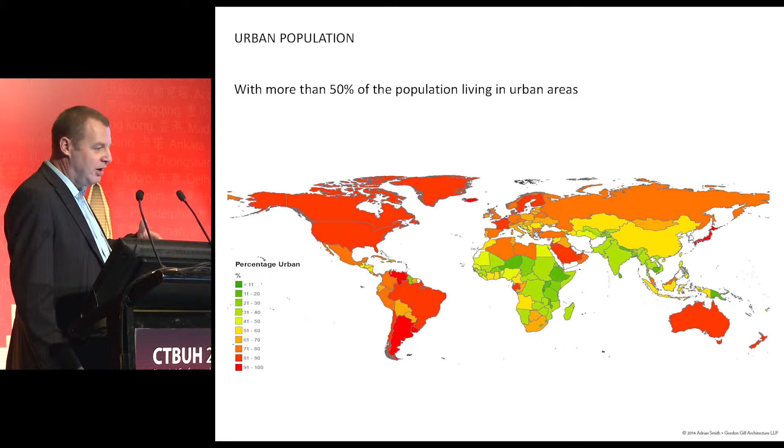But it's not just about the number of people, it's where they are. A couple of years ago they announced that for the first time in history, more than 50% of the global population is living in cities. Now it's up to almost 55%. It's huge, and again, supporting what Lucas said, it's cities that are growing. People move to cities for good reason — it provides better healthcare, better access to jobs, more likelihood of education. So people do live longer in cities, and people move into cities, and it's very clear here that well over half of the planet is heavily urbanized.

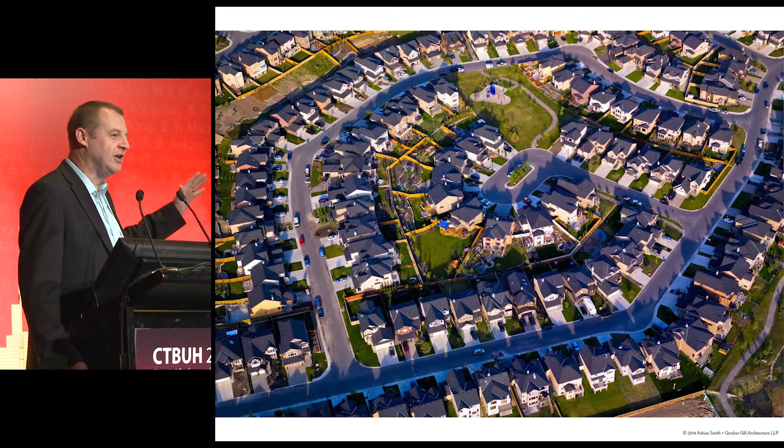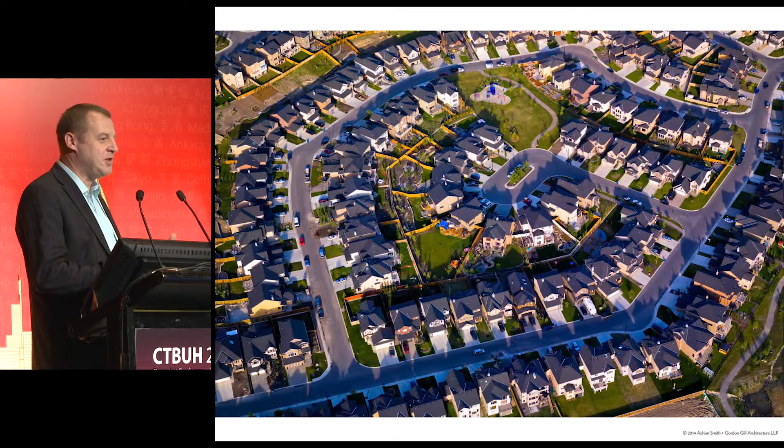So this is one consequence of urbanization, and everybody seemed to mention Naperville, so I have to mention Naperville because that's actually where I live, just outside of Chicago. This is not Naperville, but this is pretty much what it could look like — a typical suburban city that exists everywhere in the world, and this is the antithesis of density. This is the opposite: 2.5 people per home, 2 cars, well, 1.8 according to Anthony.

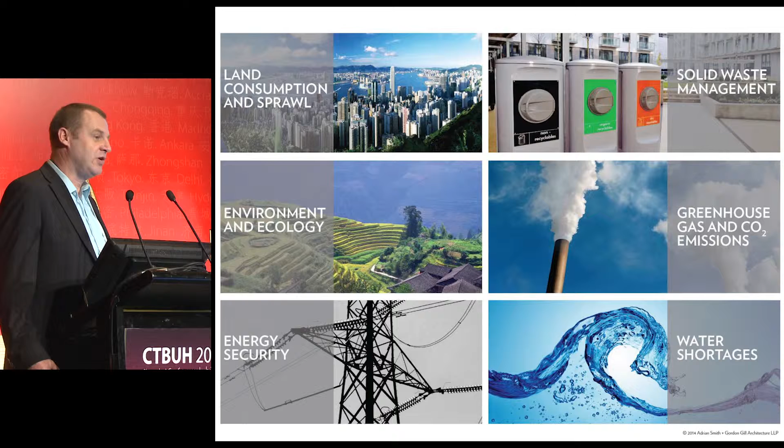In looking at my study, the study is about carbon emissions primarily — we're going to equate everything back to carbon. But there are a whole bunch of issues that urbanization causes, as you guys are all aware. I'm going to tackle greenhouse gas and CO2 emissions, but we shouldn't lose track of the fact that as we urbanize, we lose agricultural land. It's almost very counterintuitive — we're a very illogical species. We actually expand into agricultural land and then diminish our ability to produce food for our expanded population to eat, which is just very strange. But we also need to tackle issues like energy security, and water management is a very major challenge.

To try to help address it, I'm looking at energy demand, land use, transportation, and overall life cycle analysis of different communities. With that, I can start to tell you about the study.

Our study at AS plus GG took a very different approach to Anthony's. There are quite a few studies that would look to compare existing buildings, which is a great approach. The problem is, unless they were built according to the same building code, using the same materials, in the same climatic zone, with the same population demographic, you're never going to be comparing apples to apples. You're always going to have to try to make some allowance or add some kind of factor to compare it.

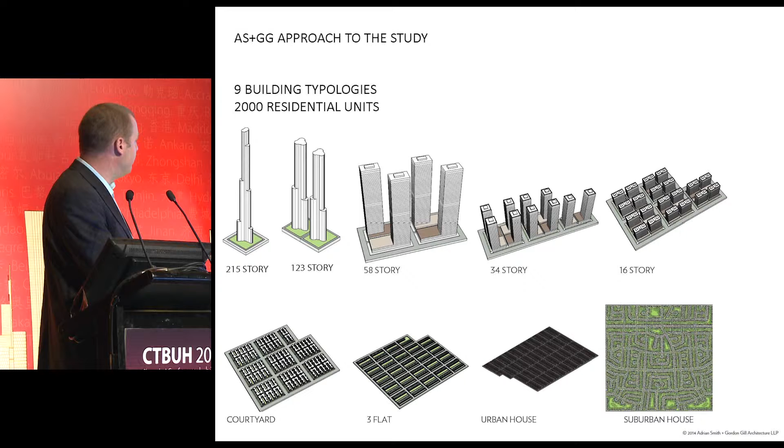We wanted to study 2,000 residential units. They could all be in one super tall tower, 215 stories or so, or they could be in 2,000 single-family homes in an American suburb. There could be 2,000 single-family homes in the actual city, or we could divvy it up any way. We came up with 9 different building typologies, all of which hold 2,000 residential units. We stuck just to residential — I know in a way that's kind of not realistic, these would probably have some other program at the bottom of them and what have you, but the idea is we're looking towards perhaps addressing the answer to a global question, which is, should people live in denser communities? That's why we picked residential.

Now, there were 2 ways to do this study.

When it comes to picking the apartment size, you have to have an apartment size. So what we did was we went out to the real estate market in Chicago. Let me just step back. Within Chicago, these typologies exist.

These two do not. There are no residential towers in Chicago, not even close to that height. But we were able to, based on things like Trump Tower, come up with a typical average apartment size for each building. So we've got two different parallel tracks on this study. One is using a market baseline apartment size, so the suburban family homes would be around 200 square meters for the entire home.

These were about 150 square meters. These smaller buildings are only about 80 square meters. So that was approach one, let's call that our base typology. We then took another approach running in parallel where the apartment sizes in all of these were identical. So we averaged it, we redesigned the buildings to be 150 square meter apartments. Just so that's in mind, I'll be talking about two parallel approaches that we did. So we did the entire study twice, one with market-sized units and one with 150 square meter units.

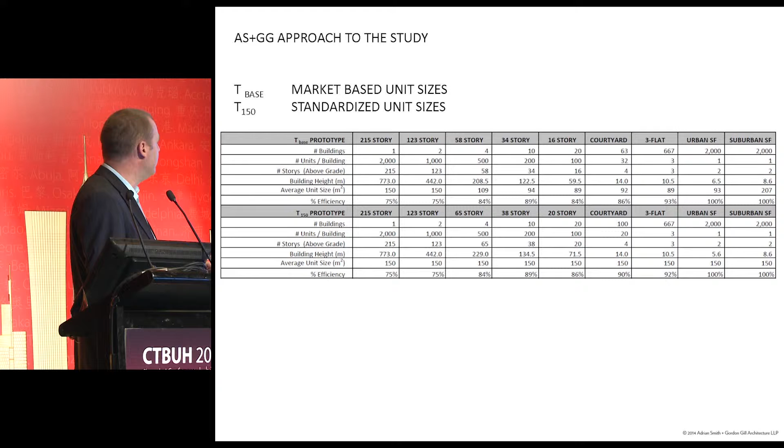Let me just say that each of these buildings was designed to meet ASHRAE 90.1 2010 energy code from a performance perspective, and the lower buildings were designed to meet the local prevailing energy code in the suburbs. Additionally, we designed the infrastructure around the city, so we created - I should go back to this one.

We actually created this community using ArcGIS. We created the roads, we created the infrastructure under the roads, so the potable water, the sewage, the storm water, and what have you. I'd just like to give a shout out to Halvorson and Partners, who helped with the structural engineering, Arup, who did the civil engineering, and Positive Energy Practice, who helped us with the mechanical systems in the buildings. So this was a collaborative effort to try to design these things to really allow us to hone in on the differences.

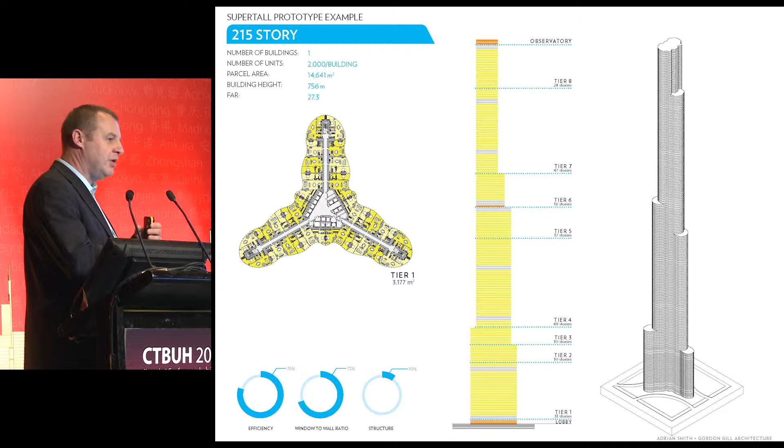So these two buildings were designed in the manner that I showed you. They were designed with approximately a 70% glazing ratio, because the reality is that buildings of this height are not going to have punched windows. These three typologies here were basically extruded buildings with podium parking. These have parking below grade. These would have car parking in the podium, and that's something to remember when we're making the comparison later.

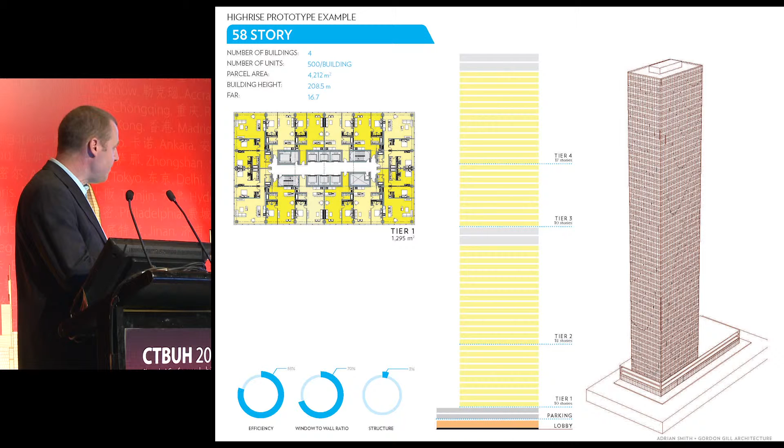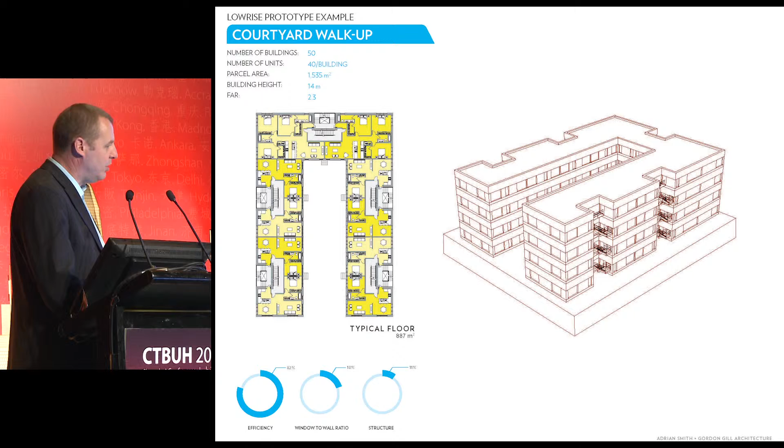Again, these have quite a high window wall ratio. Then moving into these two low-rise typologies, they were much lower window wall ratio, in the 20% kind of range, and then we have the suburban homes. The results.

So let's get to the meat of the whole study. We undertook energy modeling. We built these things in Design Builder and tested them with Energy Plus.

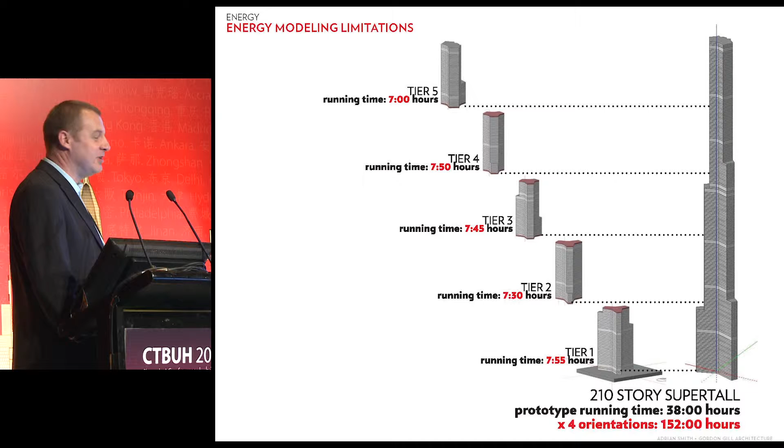My colleague wanted me to point this out so that everybody realized just how long it takes to do an energy model. Anybody who says 'oh, we don't run real-time energy simulations' - you've got to be living in a different planet to us, because we take 152 hours to do a single energy model on a tower this big. It's a huge undertaking. We ran them in all 4 orientations to follow the Appendix G model.

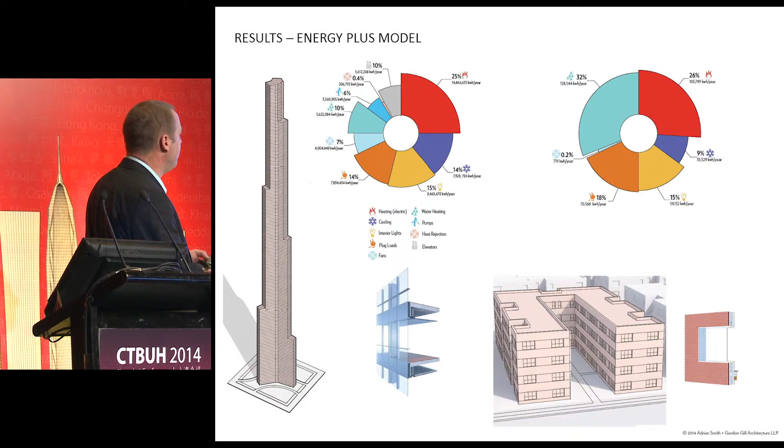And this is the kind of results we ended up with. You can see right away there's a huge difference - just the charts are completely different. And there's a lot of - it's kind of obvious to an extent. These buildings have transfer floors, they have high-speed elevators, they have below-grade parking. There's a lot of reasons why the energy demand would be a lot lower there.

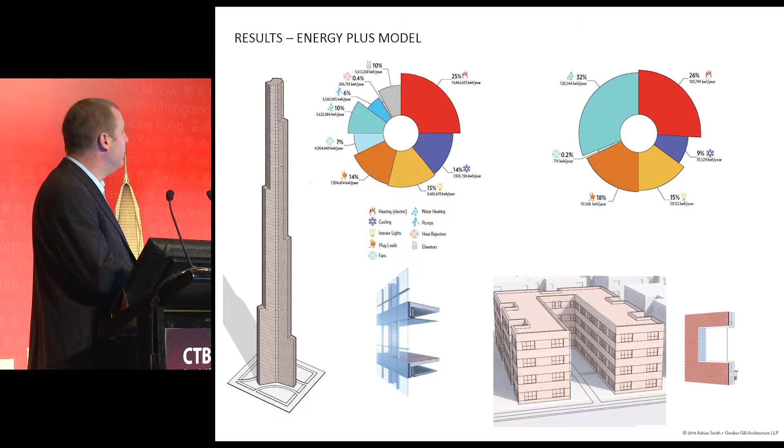It's also interesting just to see this kind of information. Anybody who's trying to justify why you should reduce water demand in a building only needs to look at the fact that 6% of the energy demand of a prototypical super tall tower is pumping water up the building, and then it comes down by gravity. There's an obvious opportunity there where you might want to do some other things.

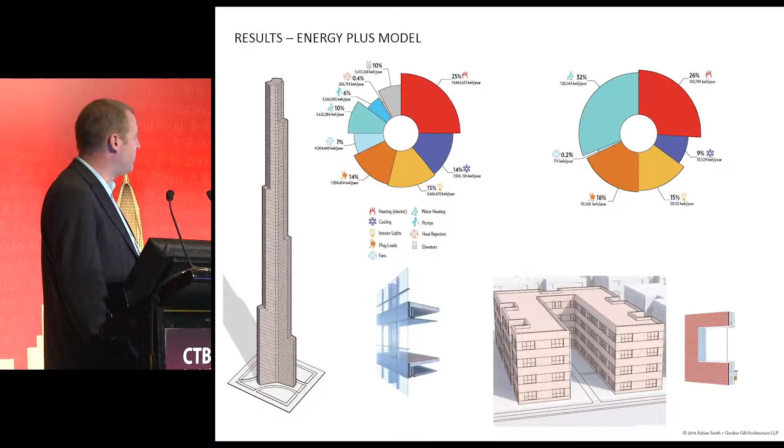The courtyard walk-up obviously doesn't have elevators - well, not obviously, but in this design it did not have elevators. And of course things like water pumping go away because it can just use street pressure. So the next 4 charts I'm going to show you are the energy results for all of the typologies, and I'm looking at it from 2 perspectives.

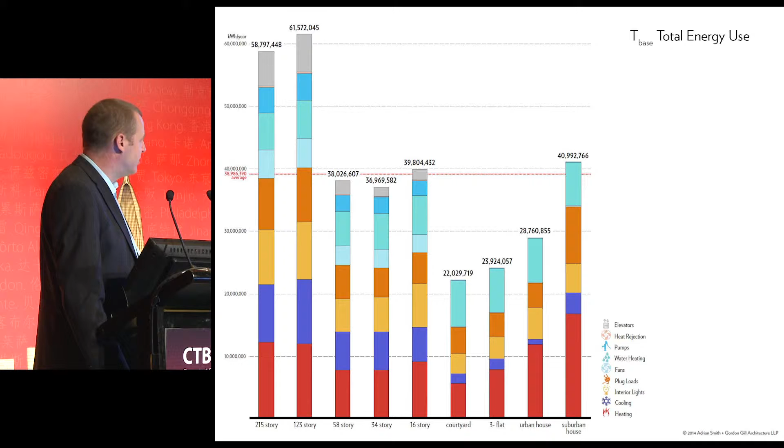One is the total energy demand of the entire community, and the second series of charts is the energy use intensity, a more common metric. This was using the market-sized apartments, and when we normalize it to 150 square meters, it looks like it's changed dramatically, but the result's the same. The 2 super talls are very high, the 3 extrusions are here, and the rest are there, so it's not too dissimilar. What's really changed is the suburban house improved considerably, because the area went down from 200 square meters to 150.

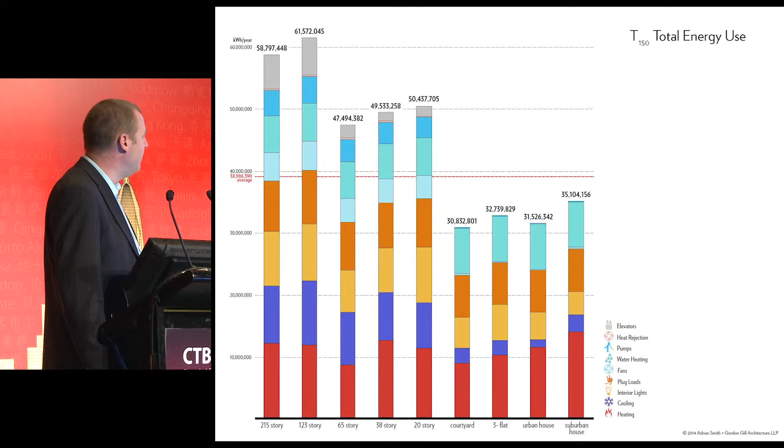Looking at energy use intensity, the kilowatt hours per square meter per year, we see a much more interesting figure, especially when we come to this number. And it's kind of easy to figure out why these differences exist.

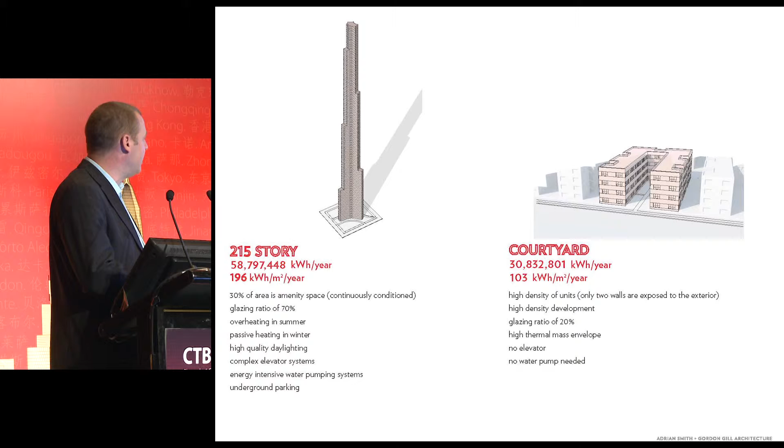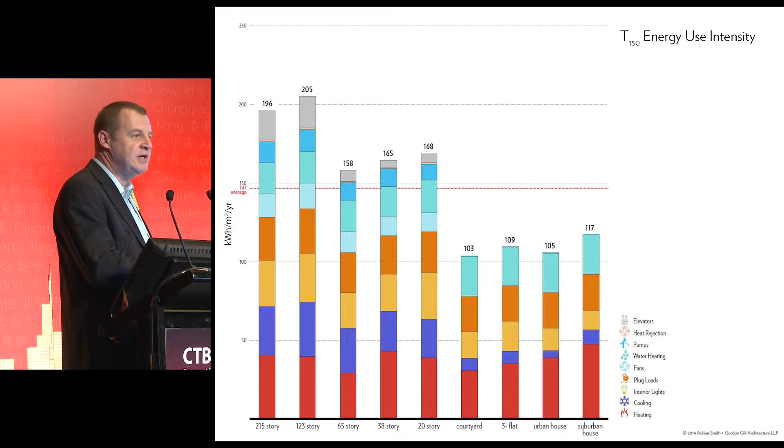I've summarized it simply here. Firstly, these buildings have a very high glazing ratio, so they take a knock on from heating requirements, and cooling requirements are increased because of that. They have a huge pumping energy demand. People don't want to crawl up a super tall building slowly, so it's got high-speed elevators with transfer floors. It's got a car park that has to be heated and cooled. These buildings, on the other hand, have podium car parking, no need for heating and cooling of that. The elevators can be a little bit slower, they don't have the transfer floors. These buildings are more efficient than those buildings. What this is, effectively, is a study in building efficiency.

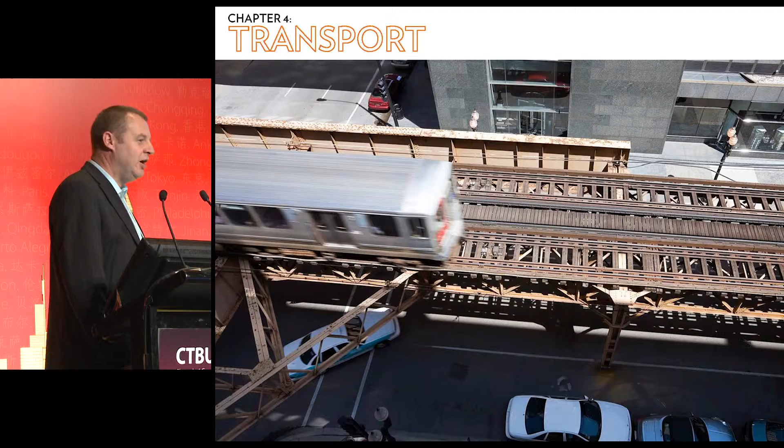I want to talk about transport very quickly. Transportation is really the elephant in the room for our study, it's the known unknown, we simply couldn't really address it. There's only one thing we could do comfortably with transport. The transport emissions of a dense community, you would expect that it's going to attract public transport. On the other hand, suburbs, people are going to have to commute somewhere. Our problem is we don't know where they're going to commute to, so making any kind of assumptions is always going to be fraught with issues, so we've left it to one side.

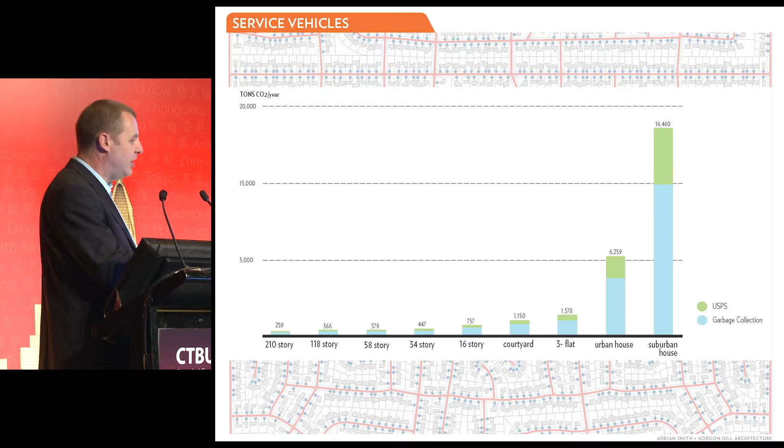But there's one thing we were confident about, your good old garbage delivery, garbage collection and postal delivery. This is just an interesting thing: if I'm living in a super tall building, the USPS guy comes once a day, twice a day maybe, the garbage truck probably comes once a day, maybe even once every other day. Here, it's the same kind of thing, but he visits every single house, traveling more than 80 kilometers around to collect waste from 2,000 homes. It's a long distance he's traveling. So this is the carbon dioxide emissions in tons per year, just for the transportation effects that we know about.

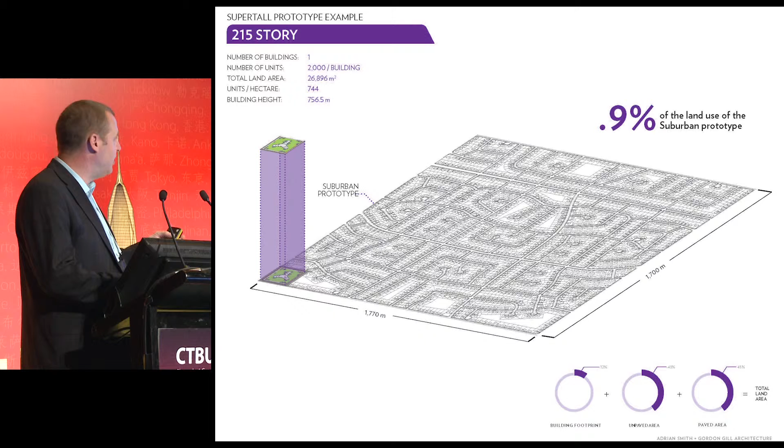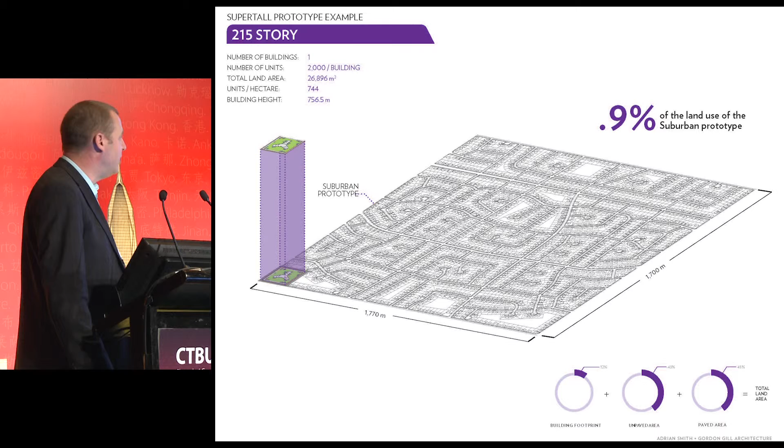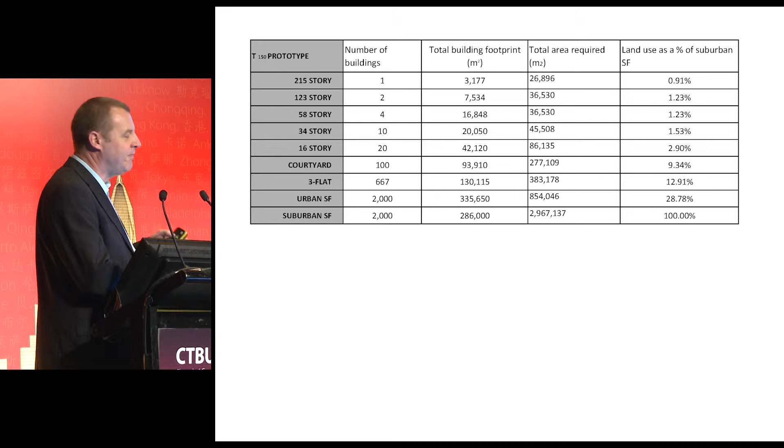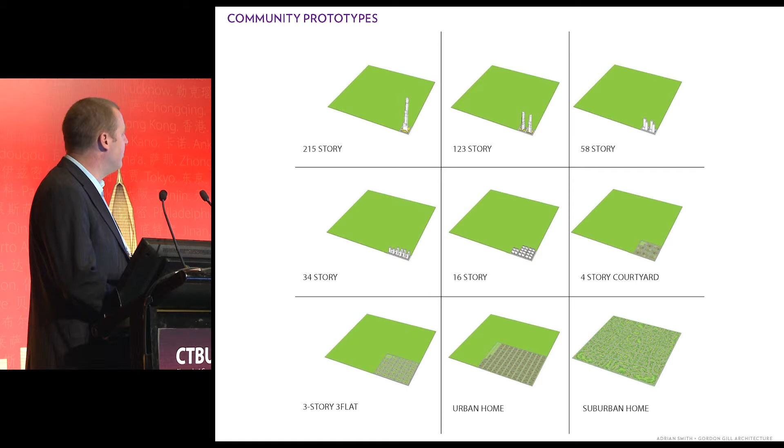I'm going to talk very quickly about land use. This is kind of obvious, but important to point out. The 2,000 homes in the suburbs occupy almost 300 hectares, 296 hectares. A single super tall tower occupies 2.7 hectares. That's a huge difference. What can you do with that land? You can only imagine. If we look at land use of the super tall towers as a function of the suburban thing, we can see it really jumps only once you start moving into housing. All of the tower typologies use a very, very small proportion of the land of a suburban development. This is just shown graphically. You can see there's a huge opportunity here.

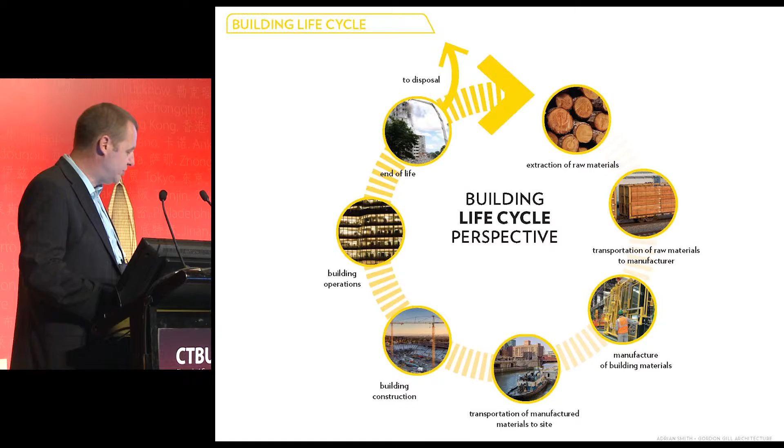Finally, I want to get into talking about carbon, because that's what we've tried to pull everything back to, it's the lowest common denominator. So I'm going to talk about the entire life cycle carbon of these communities. For those who don't know, life cycle carbon is the carbon dioxide emissions associated with every single step of the life cycle of a material: everything from extraction, transportation, manufacture, construction, operation and maintenance, and end of life, either recycling or disposal. Anytime there's a carbon dioxide emission, whether from transport or from somebody doing something, burning it, whatever, it's included in this study.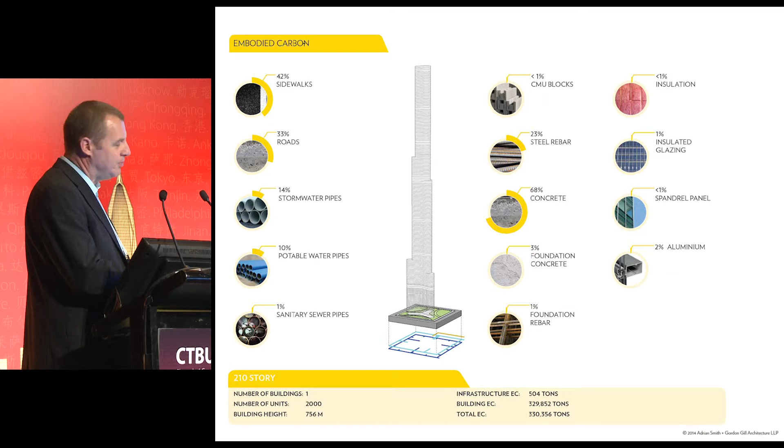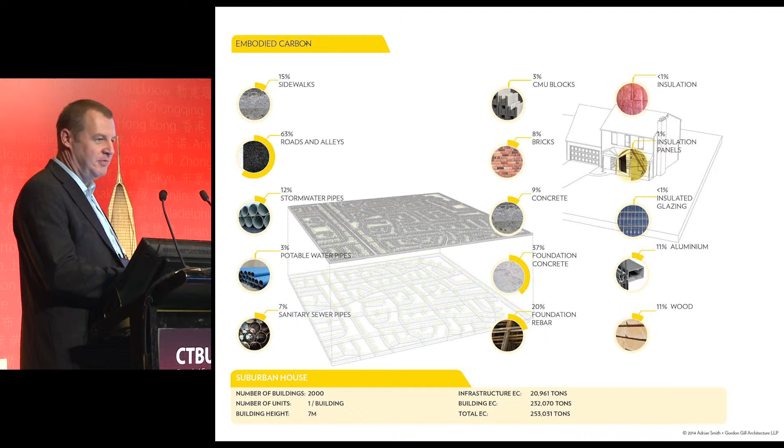I'm talking about the infrastructure emissions. Actually, you should remember both numbers, because the building emissions are also very, very high. But infrastructure in the suburban development is absolutely massive. It's a huge amount - 40 times greater.

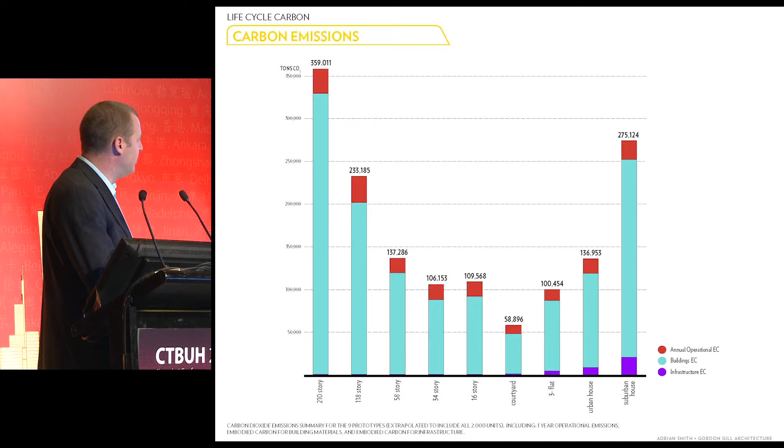Now, when we look at carbon emissions, we want to look at the life cycle carbon emissions, so now we have to add the operational CO2 emissions to this. This would be how it stands in the first year of construction, with the embodied carbon being very, very high and the operational carbon being low.

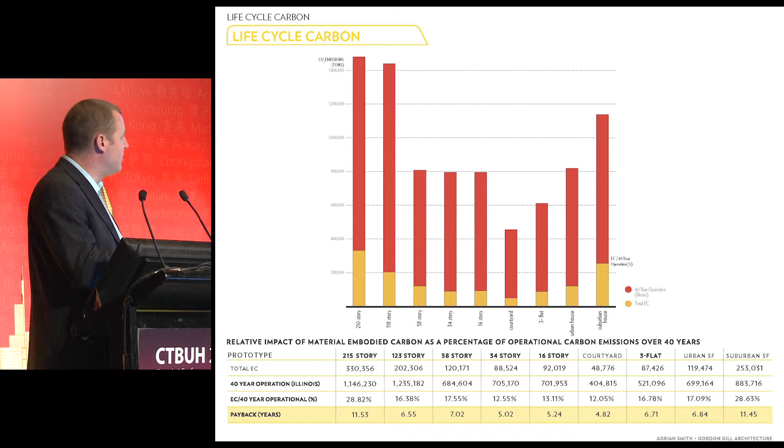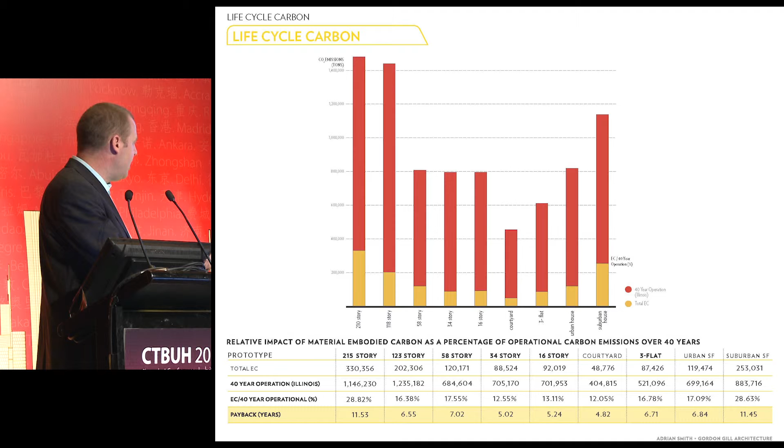You can still see that the courtyard building is coming out the best. It came out best in terms of energy demand, and it's coming out best in terms of embodied carbon. The super talls are quite poor, unfortunately. You can see here what we often see is the ratio of embodied carbon to life cycle carbon dioxide emissions, and how long it takes to pay back. So it's not until the building's 11 and a half years old that the operational emissions actually exceed the embodied carbon emissions.

But it's not just about the buildings. I told you before about the amount of land we've saved. So what if we actually factor the land into this? Imagine that I take all of the land that I've saved from not building 2,000 homes on it - that's my blue chart - and I put photovoltaics on.

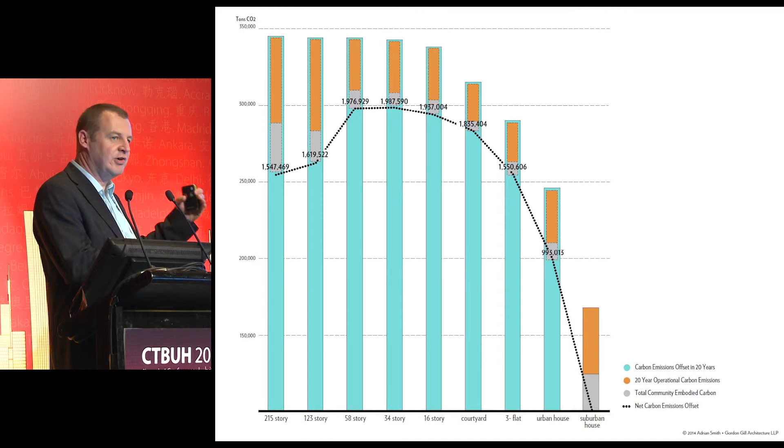We worked with Positive Energy Practice to design a proper PV farm, so it's not every single square meter covered with PVs. It was designed taking into account soiling factors, temperature from the climate, and so on. This is how much energy I can generate, how much carbon dioxide I can offset through generating renewable energy. That's the blue chart.

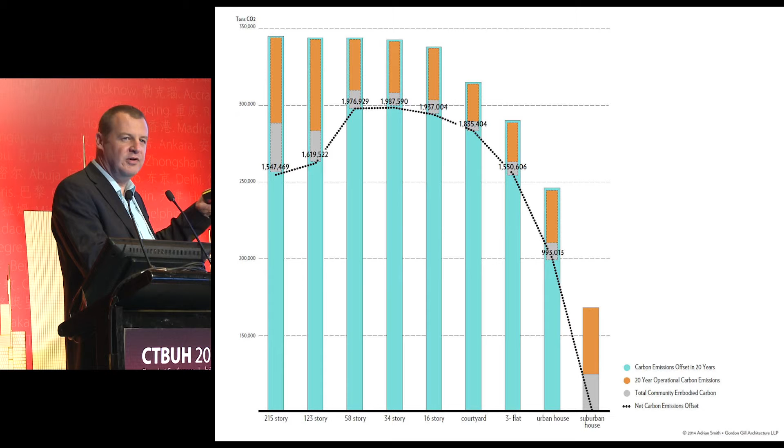So that's in my bank, that's in my back pocket. Now what I've done is, out of my wallet, I've started to take some carbon dioxide from the 20-year operational carbon - sorry, I picked 20 years for this because that's the warranty period of PV farms, basically, so I've used a different year. But if we take away the energy that I've started to use, here's what's left.

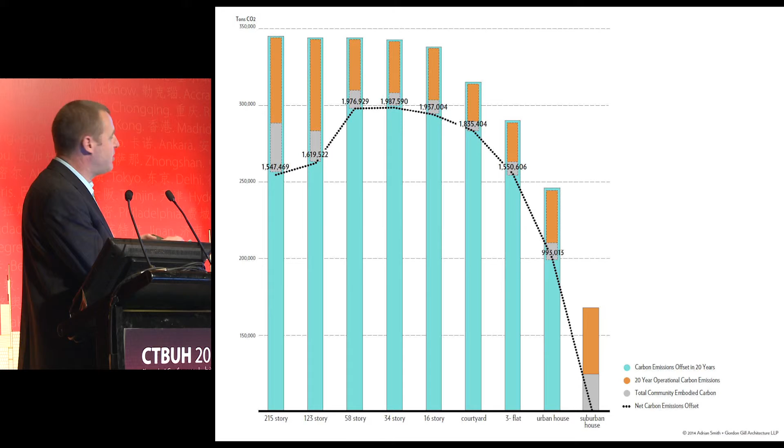This is where it's really interesting, because the picture suddenly changes. Suddenly my courtyard building is no longer the most efficient, but actually the extruded super tall buildings are the most efficient typology. They're not awesome from an energy consumption perspective, but the fact that you save so much land gives you that great opportunity.

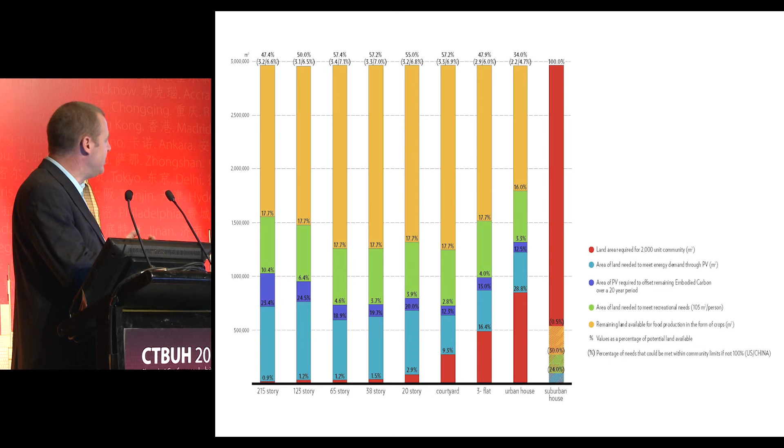So we decided to play with that whole notion of, okay, what do we do with the remaining land? This little chart here is even more complicated than the last one, but what we have here is, okay, let's just become energy positive. We're generating enough power on our spare land to become energy positive - that's these two, offsetting the operational and the embodied. This one allows 105 square meters.

This addresses Anthony's concern about open space. A very good metric for open space in Chicago would be 105 square meters per person - that's this, and this leaves that amount of land. But depending on where I am, it can produce crops for this percentage of the population, 3 to 7%.

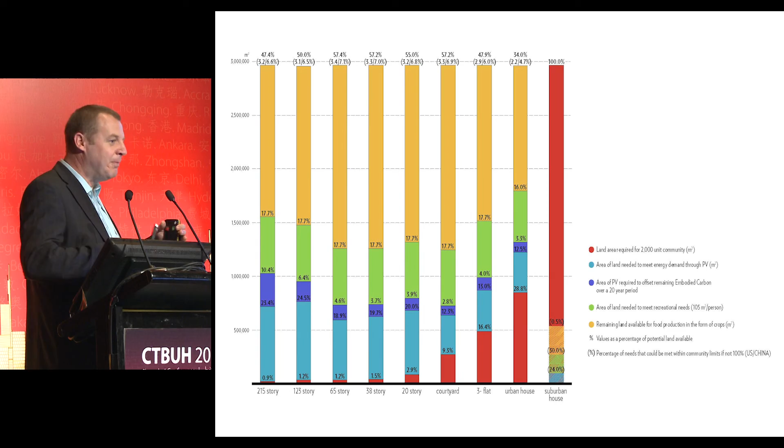So I think what's interesting about this is you can't just look at the embodied carbon of a building or the life cycle of the building. You have to start looking at the bigger picture, and what is the big answer? Which is the best building typology? I'm going to go on record saying I believe it's the extruded buildings, the tallest you can get in a simple extrusion, that gives you the most efficiency of land use. But there's a little bit more work to be done.